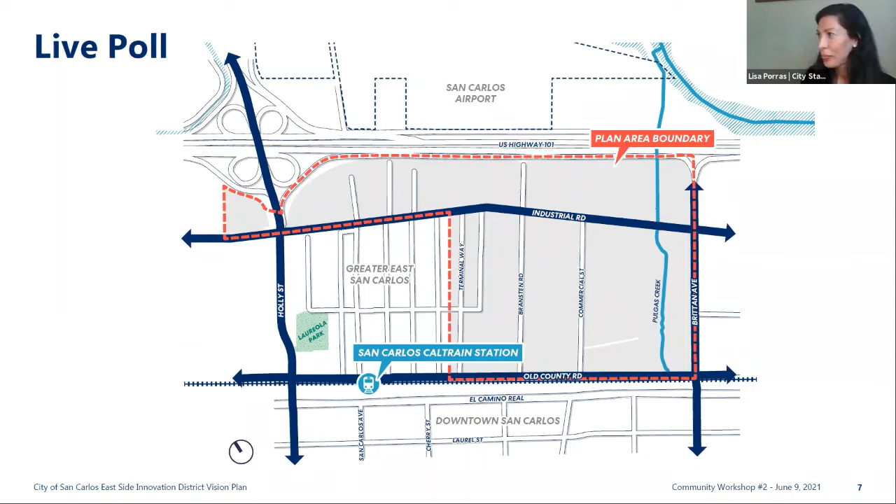Great, thanks all. Just to get us started and get a better sense of who's in the virtual room meeting with us, we wanted to run a poll to get a sense of who's attending—whether this is the first workshop you've attended or if you were with us on the 24th—along with general demographic information, and which description best fits you coming to tonight's workshop: whether you live here, work here, or own a business here.

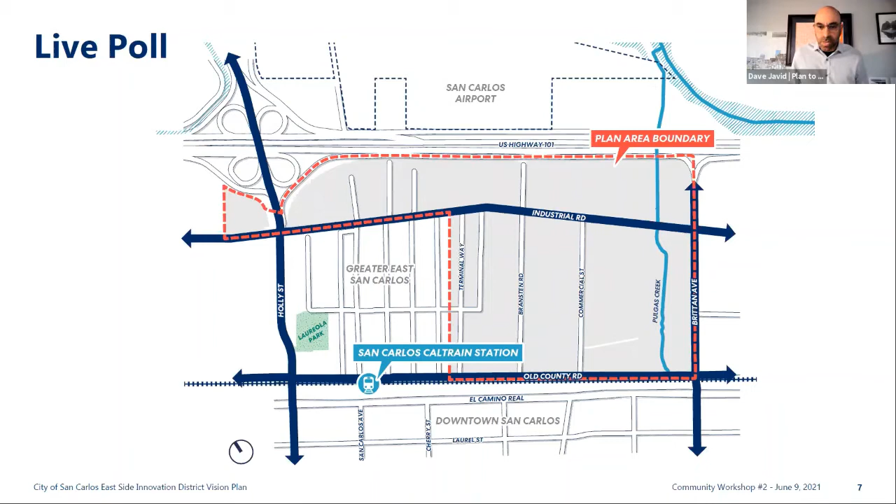It looks like we have a good cross-section of folks who have taken the poll. I'm going to go ahead and end it now, and you should see the results popping up on your end.

Geeti, do you have something? Oh, sorry, okay.

We can see that about half of you didn't attend the workshop last time, so we have a lot of new members here today, which is always great. You can all see the mix of demographics on the screen, and a pretty good mix of folks—the majority looks like they live here.

We do have some folks that work here that are with us as well, and then others that just want to get to know more about the project. This is a great opportunity here today to be able to do that.

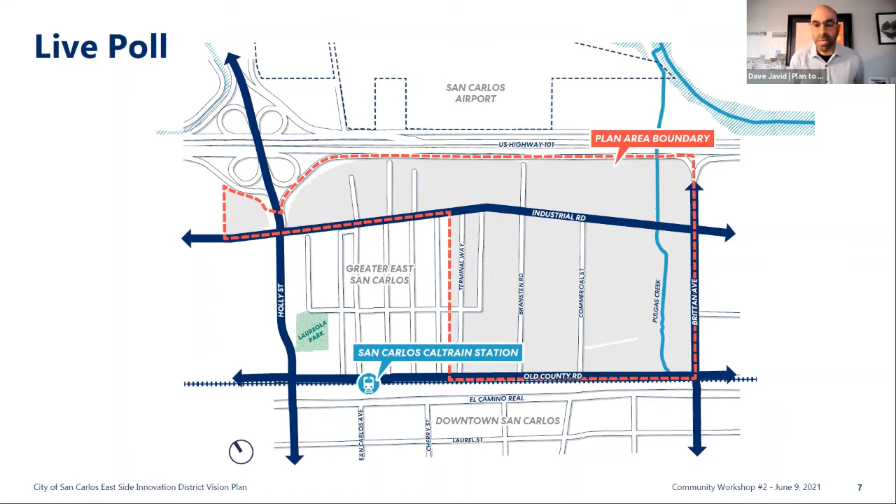What I'm going to do is provide a little bit of orientation for the folks that haven't seen the district or the maps of where this is. What you see on the screen is a bird's eye view of the innovation district area we've identified. It's between Old County Road — you see the hatch lines, that's the Caltrain rail line. So you have Old County Road at Brittan Avenue, and Industrial goes through it, all the way out to Highway 101, then up to Holly Street, jumping a little across Holly Street where In-N-Out is, and right behind In-N-Out we have a public storage building that we believe is subject to change in the near future.

The boundary on the northern side toward Belmont is right next to the Greater East San Carlos neighborhood area. The reason this is the study area is because this is where most of the change is occurring. There are several large parcels, either individually or consolidated, and we're seeing an influx of life science and biotechnology interest in this area. As many of you know, you've seen the buildings going up along Industrial in the 800 block — that's the Alexandria project, over 500,000 square feet of life sciences and biotechnology that acted as a catalyst for this area. And you see Pulgas Creek, another important landmark running through the southern section of the district, and of course our historic train station, the Caltrain line, at the southern section.

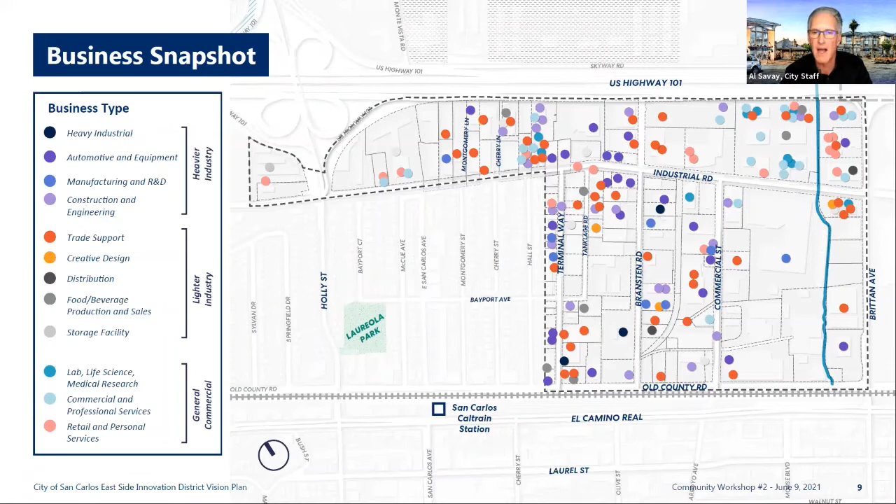So, next slide please. One of the things we need to think about as a city is how do we sustain ourselves economically. From an economic development standpoint, we need to see, well, how do we pay for our services and the things we need in our community to operate and do what we need to do.

What's unique about this area, and it's not just this area, not just the East Side plan area, but the area south of Brittan and the area north of Holly, this area we call the East Side, and that's our main commercial industrial sector of our community. It's less than 20% of our land area, but it contributes over 80% of our retail sales tax revenues in our community. So that's very significant to take a look at.

So as we move forward with this plan, in concert with our housing element update that we're doing, some of these areas we'll be looking at tonight, we'll call them sub areas within this plan, and we'll be looking at the unique characteristics of each of these areas. Eventually, we'll be deciding as a community what do we want to see in this plan, and how do we want to plan for our future in balance with our whole community and a holistic approach to reviewing land use and policy. And with that, I'll pass it along.

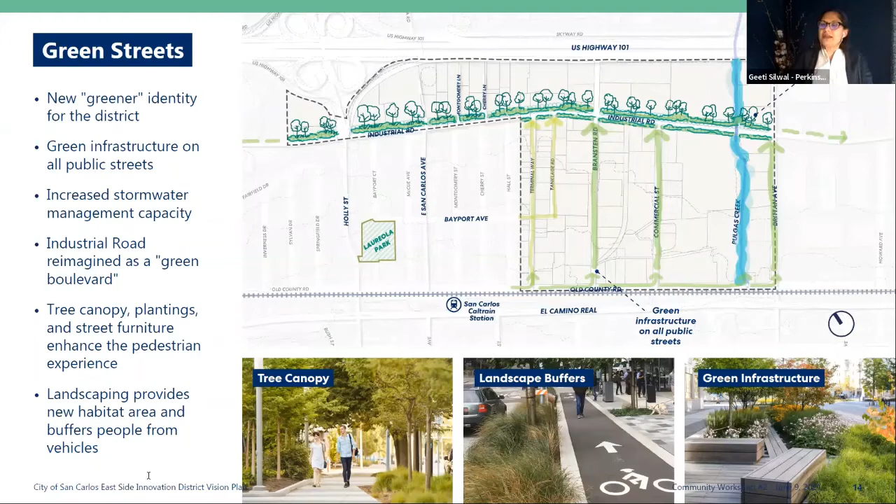The next strategy that we want to look at is how we think about the community open space network. You kind of identified for us that there are rail spurs in this district that are an opportunity to create some open space, linear open space, and we want to build on those opportunities.

But they also are an opportunity to weave in a network of alternative routes for bikes and pedestrians to navigate through this neighborhood, create a more walkable, bikeable environment, and layer in a much friendlier and safer environment for 8 to 80-year-olds to bike and walk and really make it feel like they don't always have to be in conflict with vehicles moving up and down the street. So the idea is to pick up on the rail spurs, and look at those as opportunities for connectivity.

Laureola Park in the greater East San Carlos neighborhood is a community asset, but looking at ways how we can really create a north-south spine through green, what you see as a green line over here, as an opportunity to connect to Pulgas Creek.

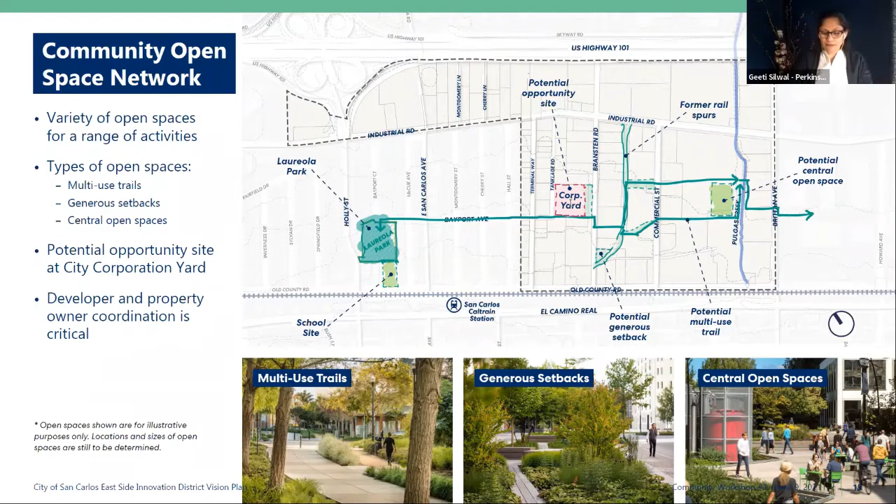There is a corporation yard that's right in the center of the district. It's a city-owned parcel with a very important use. But is there an opportunity, as we look at the future vision of this place, to reimagine the possibility of this piece of land? Could it be a park or an activity center or recreation place? It's about 2 acres, so there's definitely opportunity to rethink its use in future. We want your thoughts and feedback on those ideas when we get into the breakout group.

The third idea we are proposing is looking at Pulgas Creek. Al mentioned this is a huge asset that's really not being tapped into. We know Alexandria Real Estate is already proposing to improve the sides of the Pulgas Creek to provide a trail there. So how do we look at this as another amenity for the neighborhood, not just for future users in this industrial area, but for the neighborhoods and the larger city? It could be an attraction and a destination, and could be really pleasant. At the same time, is there a possibility to weave in flood mitigation measures? Is there an opportunity to introduce and welcome habitat in this area and look at it as a bigger amenity than just a trail along the path?

So those are the three key open space moves that we are proposing under the open space and environment bucket.

Now, talking about the district and the mix of uses, there are two strategies we're bringing forward here. First is the district sub-area. Al really helped us understand, with the business snapshot slide, that there is a variety and diversity of businesses here, and they are thriving. This ecosystem of businesses is thriving. What we realized is that we need to be thoughtful about how we look at what's existing here versus what's going to be here in the future, and what's the happy medium for both to thrive.

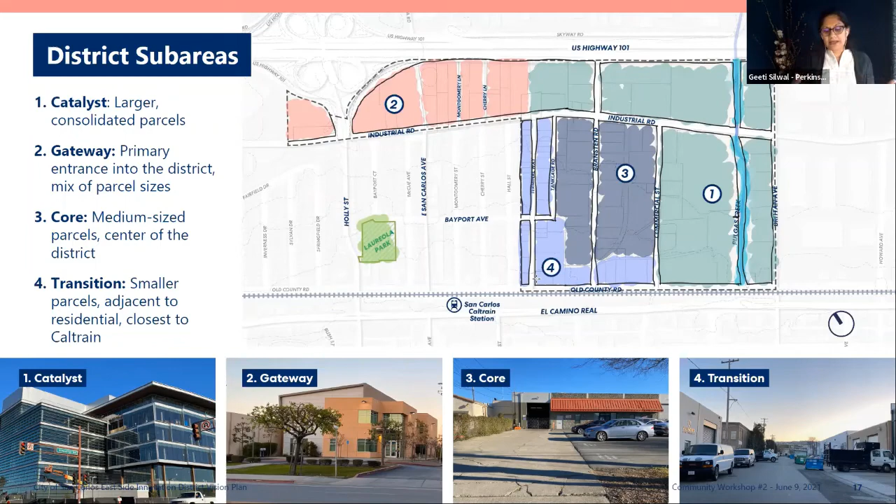And then lastly, the fourth district we've identified, which will be very different from all the other three, is this area flanking the southern edge of the greater East San Carlos neighborhood. It has much smaller parcels along Terminal and Tanklage, and a real diversity of businesses. So there's an opportunity for us to be thoughtful about how we continue to maintain some of that fine-grained character of that neighborhood, and whether we want to introduce a mix of uses or think about how things coexist. We want to give it special thought as we get into the project.

We haven't arrived at any clear strategies for each one, but we want to make sure that as we propose the character for this place, there is recognition of what exists.

The second mix of uses idea you're seeing here is really starting to see how we stitch and create that more connected framework for this place, which adds life and vibrancy, not just for the users of this district and the adjacent neighborhood, but for the greater city of San Carlos.

build on that energy. As you get into the east side area through the Arroyo Avenue underpass, the foot traffic is welcomed with more of that energy and offering along the ground floor.

Along Commercial, given its character, there's also an opportunity to be anchored on the industrial segment with another hub of active uses, which could range from cafes and restaurants to community amenities like dry cleaners or a child care facility, or other kinds of gathering spaces for the community.

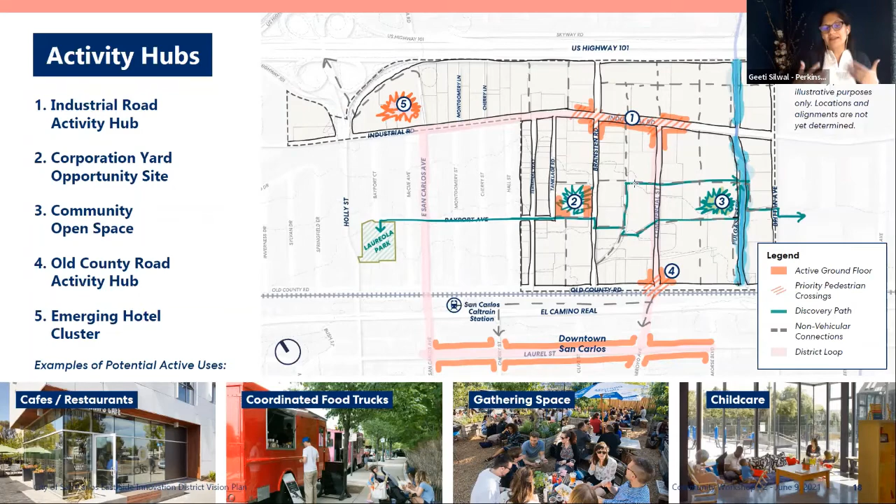We're also looking to stitch all of the existing fabric and the district with what's happening in its context, really looking at ways to enhance the experience of this place and make it as inviting a place as we can. And with that, I'll hand it to Phil to talk about some of the circulation strategies.

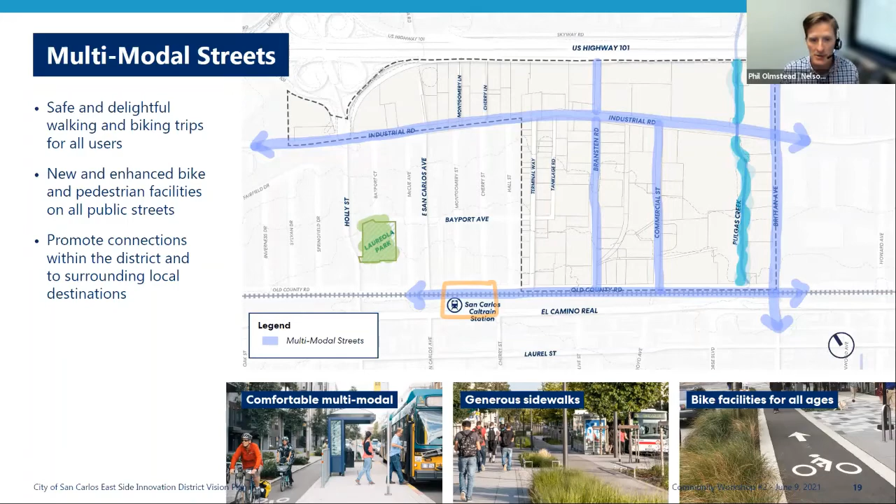Another strategy bucket is around facilitating and fostering that transition zone, recognizing that we want a little bit of a buffer as we move north into those residential zones, but continuing to allow for enhanced connectivity. Part of this is exploring concepts around shared streets in that transition zone. These types of streets serve a lot of uses in a seemingly hectic environment, but it's ultimately controlled—things like getting rid of curbs, bringing in new street alignments and sight lines, lots of landscaping, active street functions and frontages, all with the function of slowing vehicle speeds down. We obviously need to be smart about truck movements and make sure we're allowing for loading.

We also need to be proactive about management of the parking zone and the curb zone, allowing for a mix of loading activity and short-term parking. I think the end result with this kind of strategy is essentially a fun, funky mix of uses and movements that really reflects the district character.

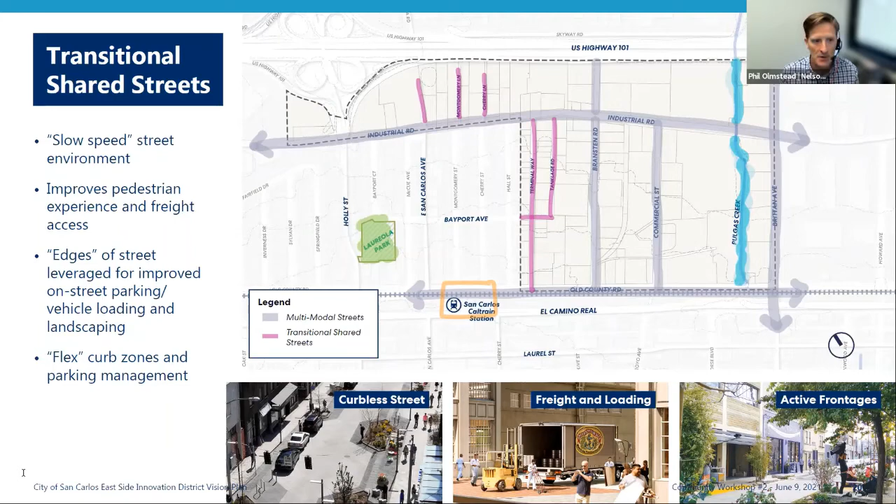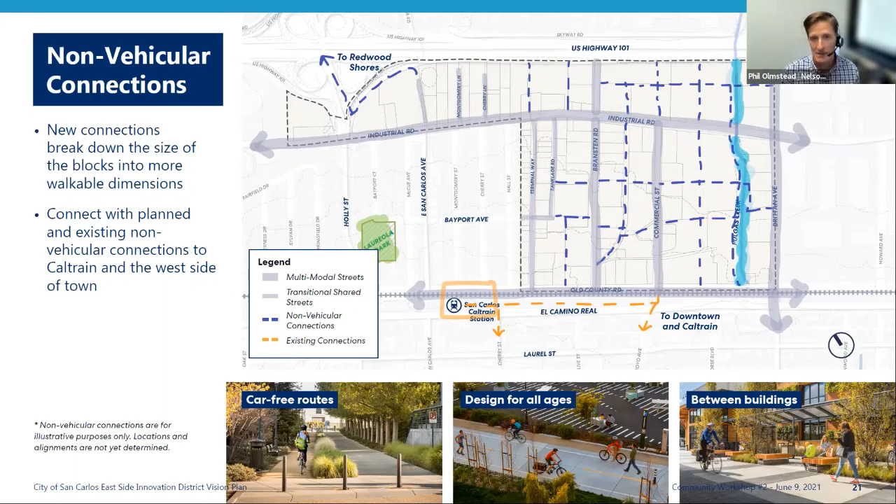So the solution set may be formal walkways, bike facilities, or more informal pathways, some shown here with dotted lines. Ultimately, we want to provide a diversity of options while capitalizing on that unique industrial flavor mixed with a sprinkling of nature that's really unique to this district. I think the benefit at the end of the day is better connectivity to local and regional assets like the Caltrain station and your downtown.

Next slide. Transit's key. We need to make it easier to travel by transit to, from, and within the district. We also need to be really smart and strategic about transit—it's very expensive to run a bus or a shuttle. So this starts upstream. We need to think not just at the stop level, but have we identified the right residential and employee markets to serve? Do we have the policies and guidelines in place to create strong bones for good transit? A lot of these transit-supportive factors are really important.

Do we have incentive programs in place with district employers to encourage people to ride transit? The last thing I'd want to recommend, and I think the city would want to recommend, is a shuttle that no one really rides. So a big part of this is having smart, coordinated conversations with SamTrans about the service improvements they're thinking about, and continuing to engage our local employers to find that right transit recipe. Last slide.

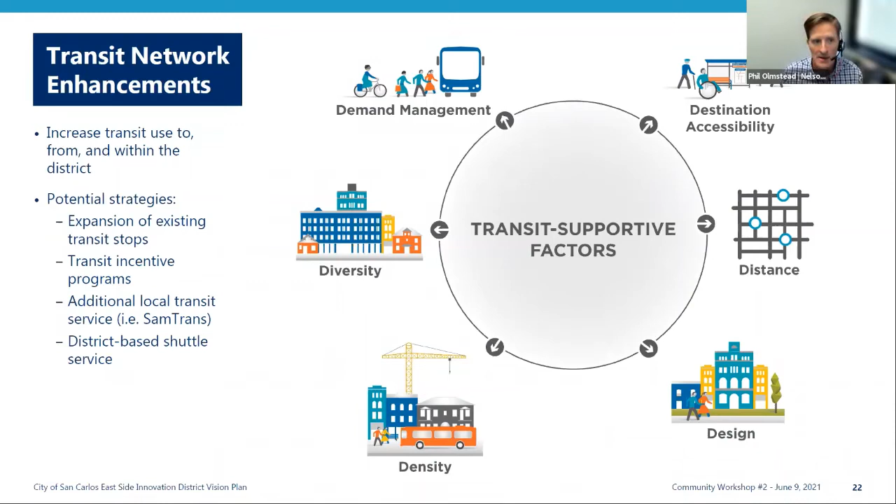And finally, parking—everyone's favorite topic. The big theme here is right-sizing. I think having too little parking isn't the right approach; it's going to impact businesses and access to businesses and district vitality. On the flip side, having too much parking is going to generate a lot of traffic and make it harder to get people on other modes. So we want a good mix of public and private parking so that businesses and the general public both have good access, and our parking system is really efficient.

This starts upstream with a vision plan, defining parking standards and requirements that reflect this district's proximity to transit, the community's desire for less traffic, and the need to reduce parking demand from employers and businesses through different incentives and programs. We don't want a lot of surface parking. We want to try to consolidate it in key nodes, allowing people to maybe park once and then get around the district without their car.

And finally, I think we need to pair all of those policies and ideas with good proactive management of on-street parking. So our front door spaces are for customers, our residential streets are for residents, and we get that good turnover of those prime on-street spaces.

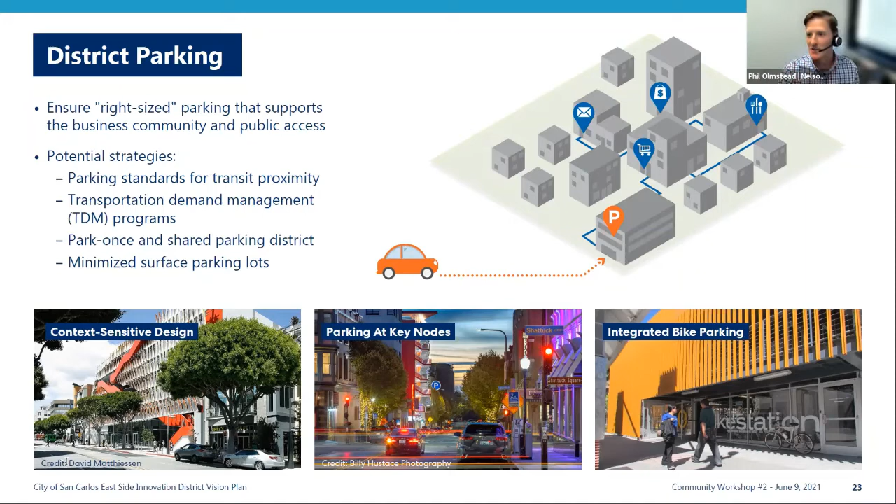So I threw a lot at you. I know our team threw a lot at you. I think, Dave, we're ready to maybe transition and really facilitate that good discussion that I think everyone's eager to have. That's right. Thank you, Phil, and thank you, Geeti, for that great presentation.

As we mentioned earlier, we're now going into the most important part of this meeting, to hear from you all. For those that joined us last time, and for those new to the process, we're going to do something similar, essentially an open house, as if we were all here together with stations set up around the room that you could visit on your own. We're going to do that virtually here, giving you the choice to choose which topic you'd like to discuss, and you'll freely move into that room on your own once we open it up.

So you'll see something pop up on your screen. We have 2 rooms set up, one on circulation, and the other room is on open space and mix of uses. You can choose which room you'd like to go into.

And the idea is in about half an hour after the first set of discussion, we'll have a transition point, and you'll see pop-ups on your screen from me giving you time updates. That'll give you an opportunity to move to the other room and start the conversation on the other topic if you'd like, or you're welcome to stay right where you are.

As promised, we're going to try to wrap up around 8 o'clock. If the discussion is going well, we'll continue on beyond 8 o'clock if needed, but the hope is we'll wrap up around 8 to respect your time. We'll all come back together in the main room and do a quick closing, or you're welcome to leave the meeting really at any time.